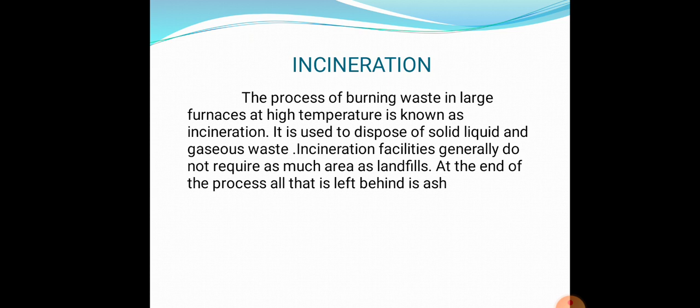It also sterilizes and stabilizes the waste with a reduction in the volume, and it is a process in which carbon, hydrogen, and other elements in the waste mix with oxygen in the combustion zone and generate heat, and this reaction we call oxidation.

Now coming to the incineration objectives. So what are the objectives of incineration? It can be broadly classified under four heads, namely volume reduction, stabilization of the waste, recovery of energy from waste, and sterilization of the waste. So we'll see each of it in detail.

So volume reduction. Depending on its composition, incineration reduces the volume of the solid waste to be disposed of by an average of 90%. The weight of the solid waste to be dealt with is reduced by 70 to 75%, and this has both environmental and economical advantages since there is less demand for final disposal to the landfill. So this is about volume reduction, and coming to stabilization of the waste.

We know that the input into an incinerator is the solid waste and the output is the ash. So the incinerator output, that is the ash, is considerably more inert than the incinerator input, that is the solid waste, and this is mainly because of the oxidation of the organic compounds of the waste stream, and this leads to a reduction of the landfill management problems and the organic compounds present in the landfill leachate.

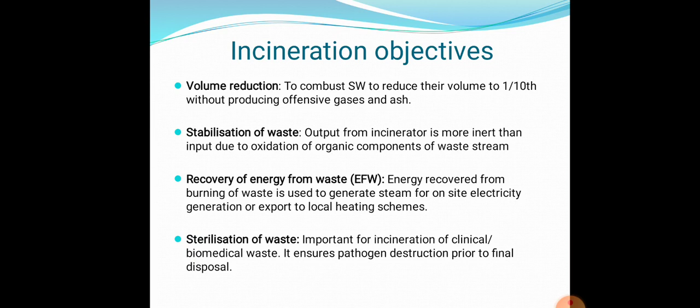Now coming to the various factors that affect incineration. They are namely the waste moisture content, the heating value, the inorganic salts, and high sulfur or halogen content. So waste moisture content: the greater the moisture content, the more fuel will be required to destroy the waste. So the more the moisture content, the more fuel we require to incinerate or destroy the waste.

And again, heating value: with no significant heating value, incineration would not be a practical disposal method. There should be a significant heating value; only then will it be possible to have an effective incineration method. Then the inorganic salts. Some wastes which are rich in inorganic alkaline salts are troublesome to dispose of in a conventional incineration system. A significant fraction of the salt will get collected on the furnace surface, which might eventually create a slag or cake and severely reduce the ability of an incinerator to function properly. So inorganic salts are also an important factor to be considered.

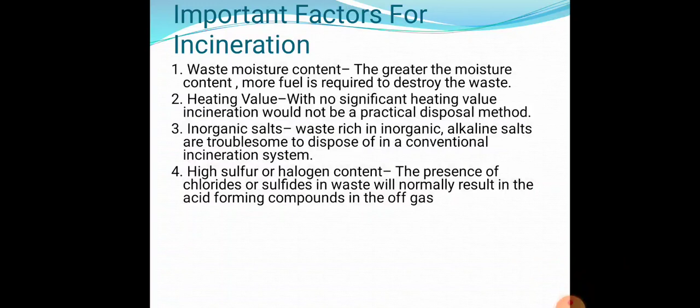Now coming to the various parts of an incinerator, a typical incinerator consists basically of three components: the furnace chamber, the heat recovery boiler, and the flue gas treatment plant. So we'll see what they are.

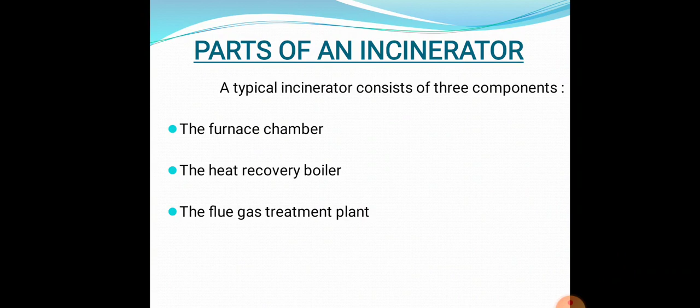So as I told you, the typical incinerator consists of these three components, that is the incinerator furnace chamber, the heat recovery boiler, and the flue gas treatment plant. We'll see each of it.

The incinerator furnace chamber. In a municipal solid waste incinerator, the waste material is usually burned in a refractory lined furnace chamber as a moving bed on a grate with under fire air. So the waste material is actually not homogeneous, and various techniques are used to mix the burning material on the grate as it progresses along the chamber.

So this is an incinerator furnace chamber into which the not homogeneous, or we can say heterogeneous, waste will be passed on through the incinerator furnace chamber. For example, a reciprocating grate or steps allowing the materials to fall and dispose may be used, and other mixing techniques used include the rotary kilns and the fluidized beds.

Next, coming to the heat recovery boiler. So this consists of two stages. That is, in the first stage, the gases are cooled by radiation of heat to the walls, while in the second stage, the gases are further cooled by convective heat transfer to the tubes located in the flow.

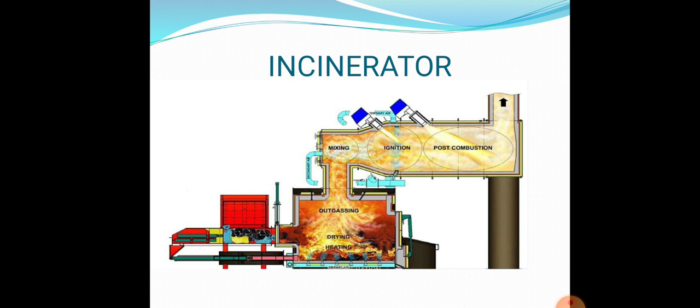Coming to the flue gas treatment plant. So to minimize the emission of the pollutants, the first stage of the flue gas treatment is achieved in the furnace and boiler by ensuring that there is sufficient excess air and residence time to complete the combustion process.

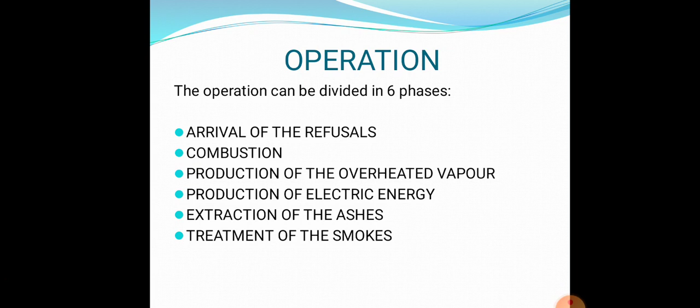So the incineration facilities actually incorporate a number of general methods for ensuring the proper combustion and reducing the emissions. A steady situation with no major fluctuations in the waste feed supply rate, the combustion air flows or other incineration conditions promotes efficient combustion. Inefficient combustion can result in higher levels of products of incomplete combustion.

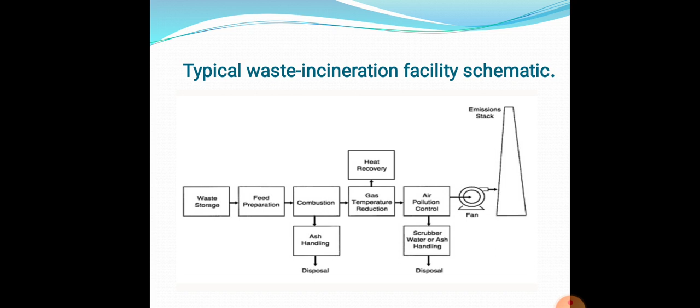Similarly, the more often a facility is started up and shut down for maintenance or because of inadequate or varying waste stream volume, the more uneven the combustion and the greater the potential for increased emissions. So, optimal design and operation of a furnace requires attention to incineration temperature, the turbulence of the gas mixture being combusted, and the gas residence time.

Then adverse weather conditions have no effect in the case of incineration. Lots of advantages, like the ash residue is actually non-putrescible or sterile. The ash that is obtained from the incineration process is normally non-putrescible or sterile. And also technology exists to completely destroy even the most hazardous material in a complete effective manner. That is one major advantage of an incineration process.

Then it requires a relatively small area compared to that of a landfill, and by using heat recovery techniques, the cost of the operation can often be reduced or offset through the sale of energy. So these are all the advantages of incineration process.